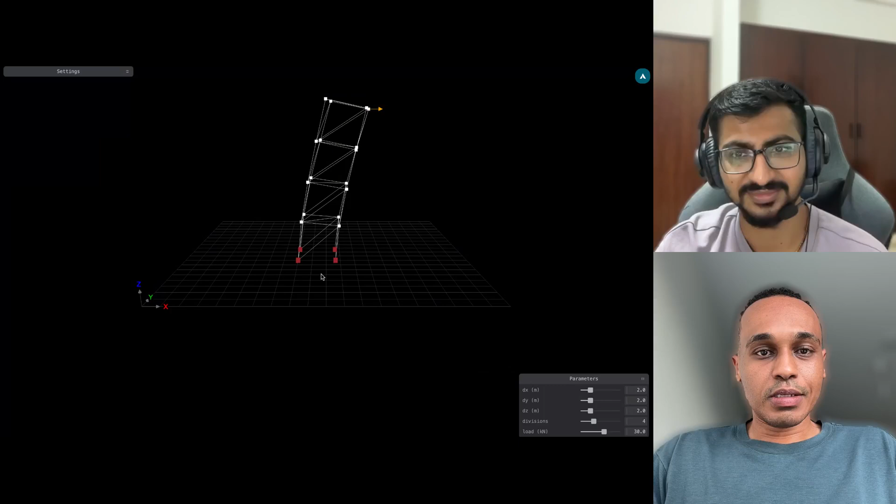It's just a parametric platform that's different from Python or Grasshopper because it's web based. If you go to the examples, it's at the right side. Maybe you can open the one on the top right, this 3D structure one. So this is how we imagine an FEM solver running. Are you with me? Yes. I think maybe the network.

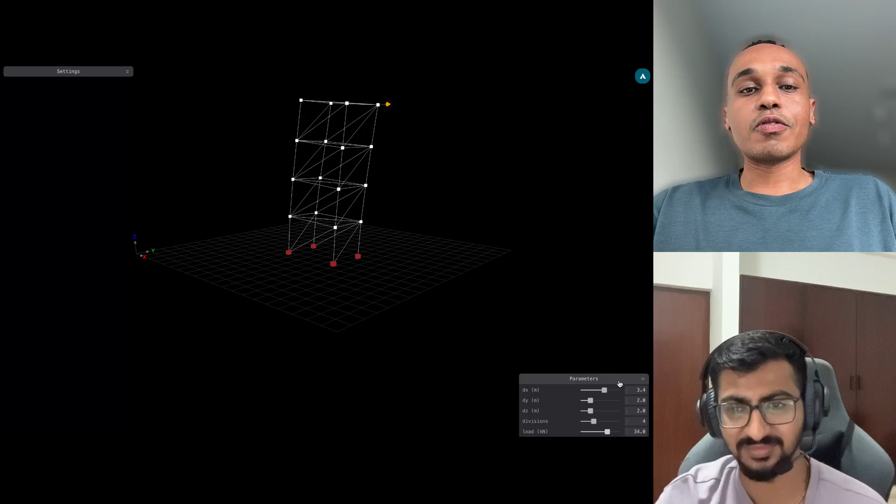If you change the parameters here, the analysis is also running in real time. This is what we're trying to do, build your structure in a parametric way, and at the same time attach it to a finite element analysis. If you change the load, just to prove it's a real-time analysis, this is the load at the top, as soon as you increase it the deformation increases. If you want to read the internal forces, go to the settings at the top left, the frame result at the bottom. Click on it and choose normal forces, and maybe decrease the display scale at the top so it's more visual. So this is the internal forces, the actual one, like 18 kilonewton tension and compression on both sides.

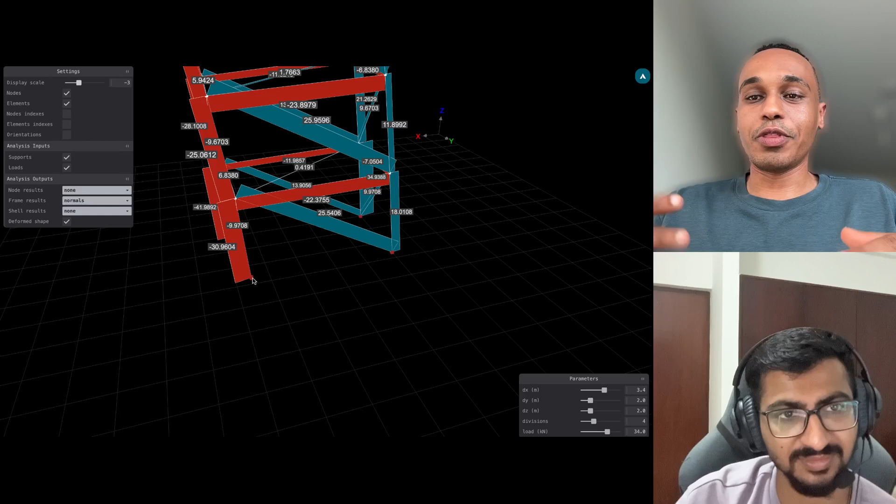So this is in a nutshell what we're trying to do, but now we focus on a building instead of a truss. If you change the column location, you see the displacement, and you can have instant discussion with the architect about how your structure is behaving. So how do you imagine the workflow? Is it quick interactive analysis, making analysis accessible to architects, or for structural engineers at the conceptual or schematic stage, to quickly do analysis and make decisions?

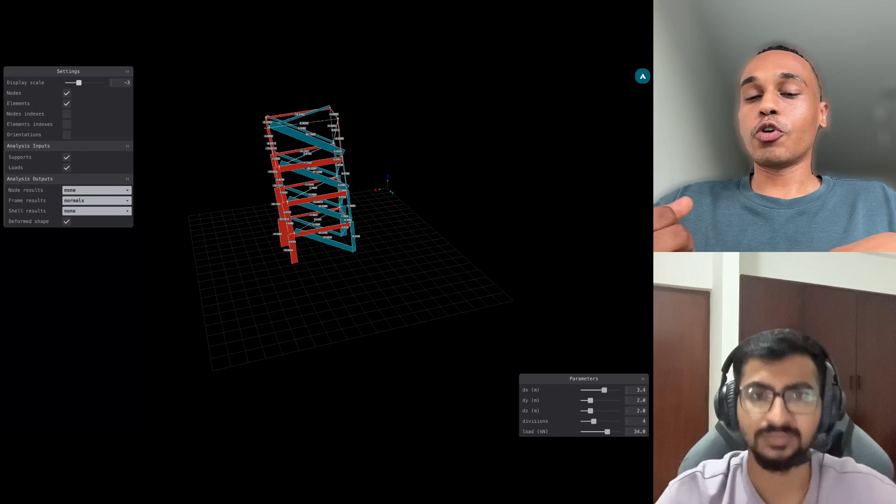Now we focus on the schematic stage because it's simpler to tackle. If you want to tackle a problem like the details stage, that's because, I think, the name 'details' means it's heavily detailed and takes a lot of effort. But the real roadmap is to reach the level where you can produce drawings and produce a structural engineering report from this parametric script.

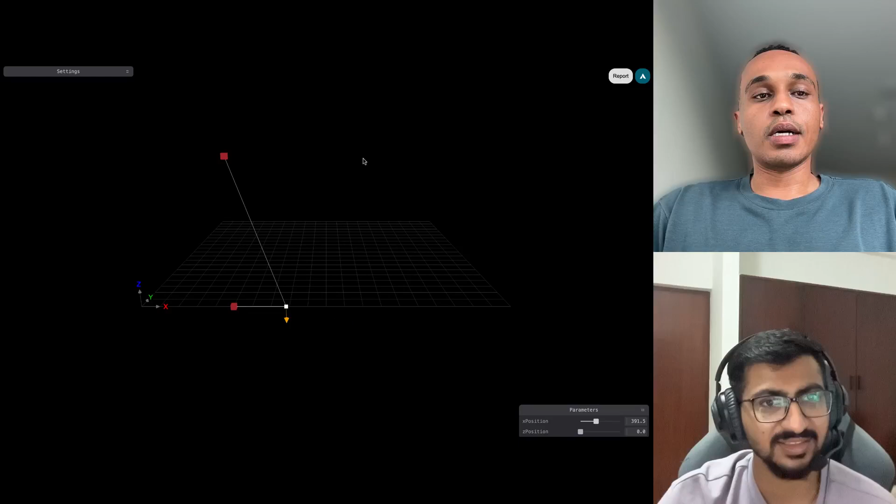So if you want to see an example of the report here, press the report button at the top right. So this is a sample report from this parametric modeling, with the reactions, with the support. And if you change the parameters, the report will instantly update as well. So we're aiming to have one unified platform where you can do the whole process, from the geometry until the reports and the drawings.

It's very exciting. So there's one major component of analysis, report, Excel export. Do you also envision modeling capabilities being added, or should one model it in Grasshopper or Rhino, or maybe Revit, and then import it here?

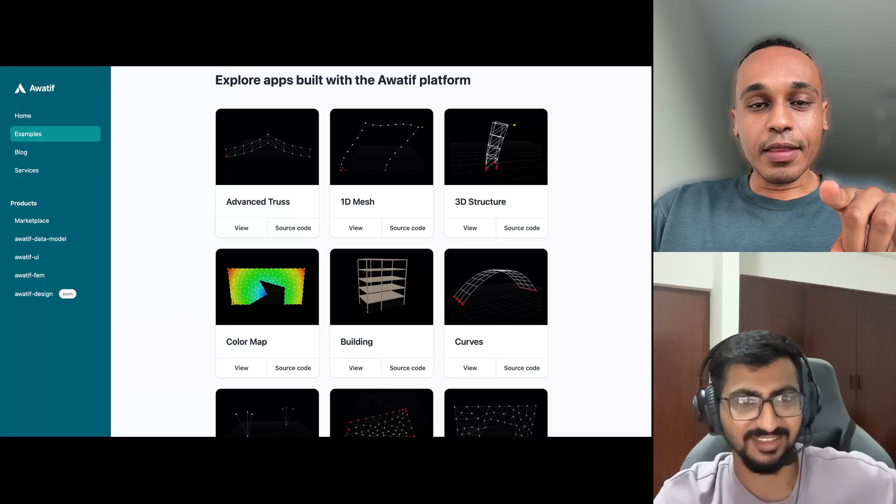This is actually a work in progress. I can show you something that is not finalized, but if you go to this link, or go to the example named Slab Designer in the URL after the examples.

If you can see on... okay, I see. Just type slab dash... okay, designer. Yes, this example. So we're trying also to incorporate the modeling.

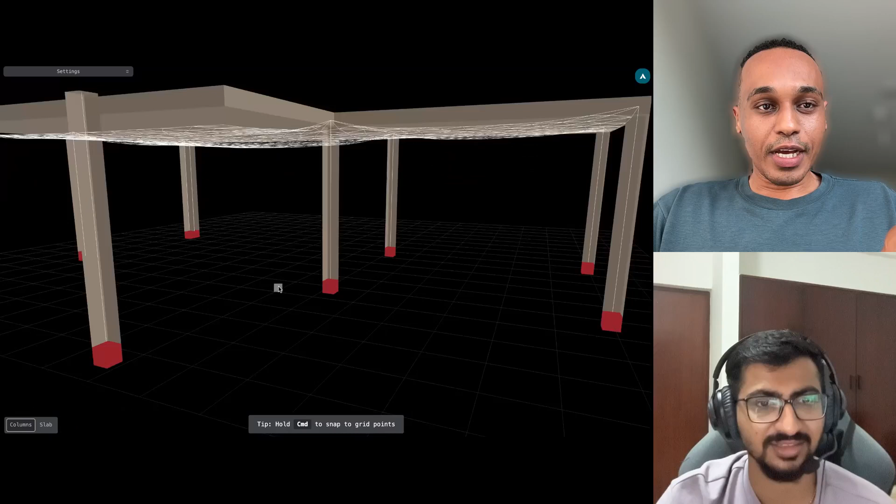So these red dots are the columns. Try to change the column location. And what's more interesting, if you visualize the displacement, go to the settings, shell result, visualize this and remove the solid so we can see the displacement, the last one.

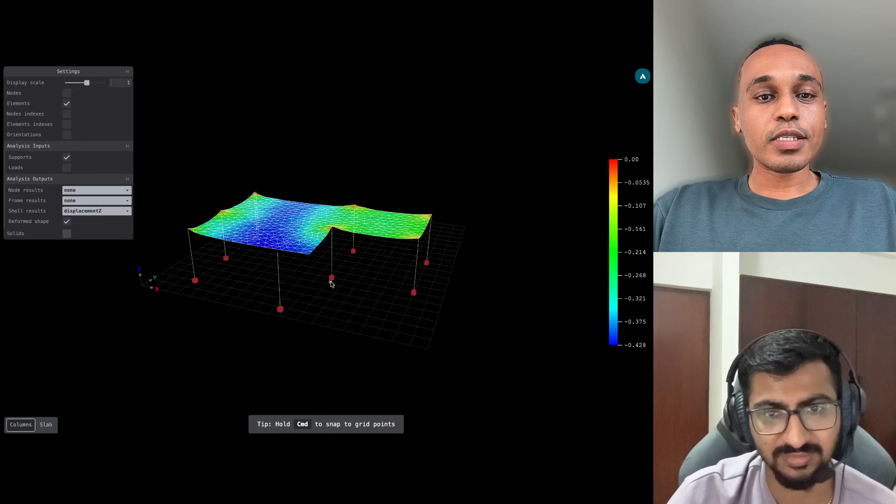So this is like a real-time simulation that shows you the effect of the column you just added. Nice, so we're also incorporating modeling.

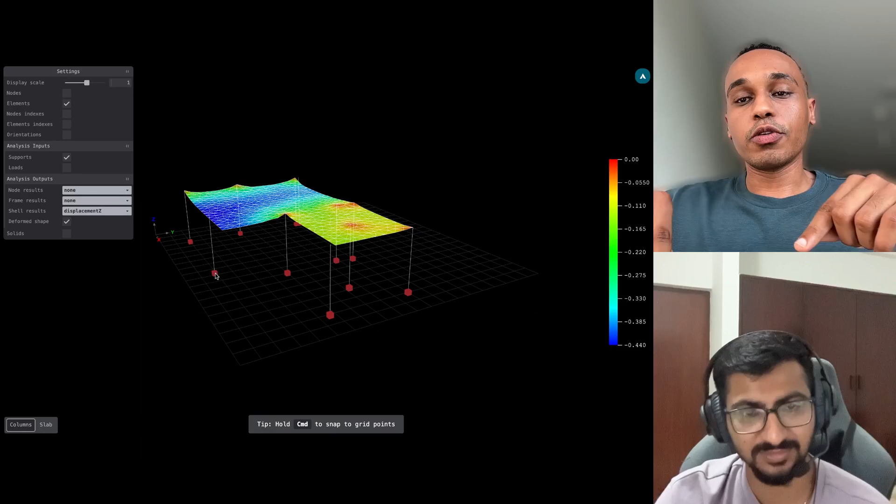So what we envision, if you have an architecture plan, you import it to this app, you draw the outline of the plan, you draw the column location, and that's it. This is your input. Then you can do FEM analysis, you can do lateral system, like we do it in a parametric way.

You choose the lateral system you want: is it X bracing, is it shear walls, is it moment frame, and you select the parameters. Then the modeling happens in a parametric way. So we call this a hybrid approach.

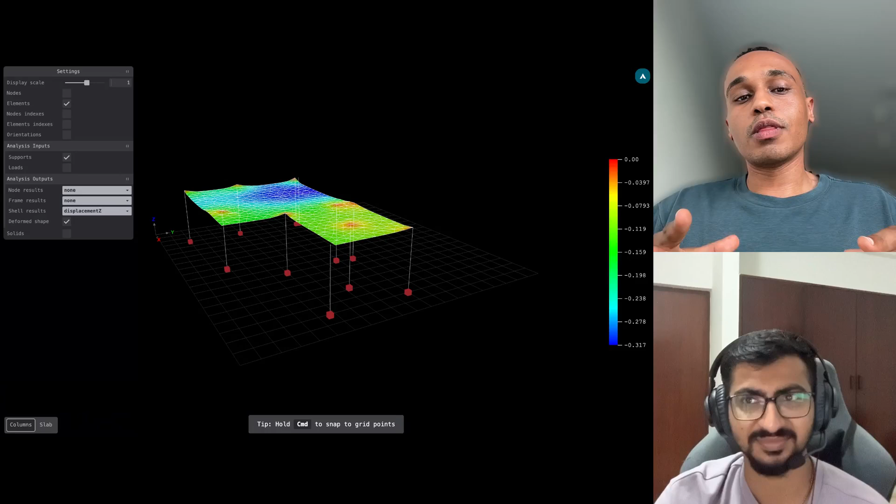You manually draw the column location, but the system is generated automatically or parametrically. With manual drawing, you have the flexibility to draw whatever you want. With the automated lateral system or gravity system, you save a lot of time of generating this system instead of drawing and expressing them one by one. That used to take weeks, but now it's way more straightforward.

How do you envision the future roadmap? Can people contribute to this? Yeah, it's open source. If you go to the bottom of this page, there is the repository. It's a very active repository, and we're working on it.

Now we have about five committed contributors, but there are also people who just find a bug and are interested in working on a specific feature. So this is all community driven. Everything I showed is open source.

The FEM solver, we wrote it in two languages, JavaScript, then we run it in C++ because it's faster. This is why you can see it was very fast. So it's all open source under the MIT license.

We are not doing this to make a VC-funded company. We're doing this because we just like what we're doing and we have this common vision: we need to improve how we design structures.